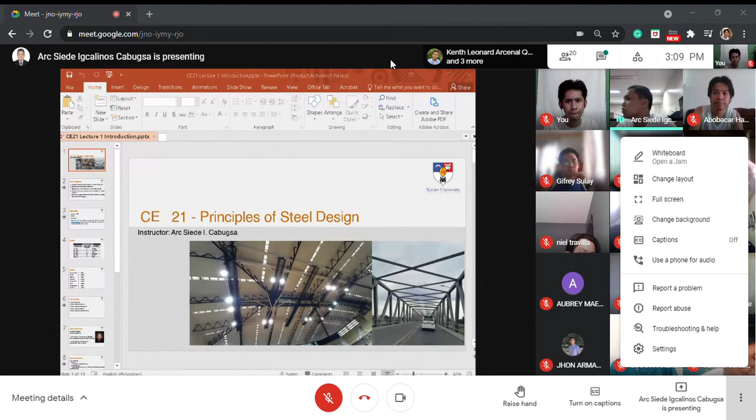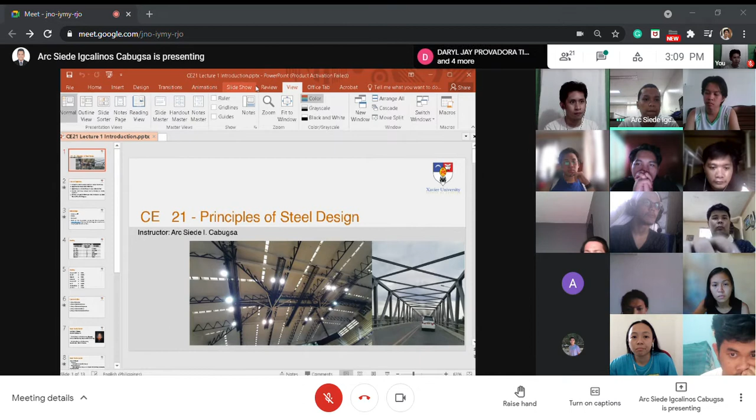Okay. So this is steel design, CE21. It used to be CE51 man siguro to sa una. Dili ko kabaloon sa ilahang basis for the class code nga ilahang gibago. Alright. Sige. So kani.

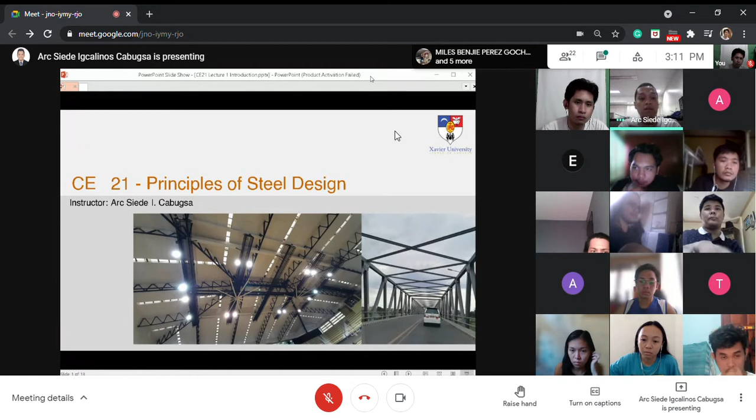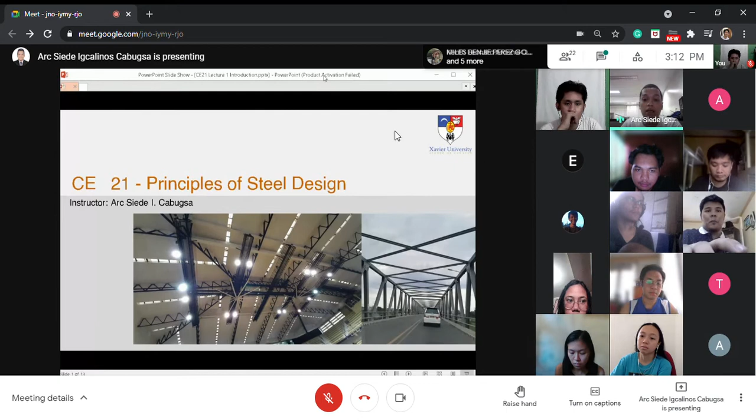Okay, so these are the things na in the future kaya nato i-design pag mahuman nato ang course nato, ang steel design. So that's the simple course description for steel design. You know, knowing the basic principles of steel design, and of course knowing how to design the basic needs of the community nga naghihimo na ug mga steel structure. Okay?

First, we identify the constituent materials of steel. You also need to understand their behavior. Pero I believe na nahuman naman nato ni sa strength of materials, katong elastic region, inelastic region, plastic region, then katong rupture. So same gihapon diri sa steel design. Pero we are still going to review on that concept, then atong gamiton ang mga steel, right?

We'll also apply the fundamental principle of steel design. So katong picture ganina, we'll try to design that one at the end sa course. We'll apply techniques in structural design and analysis. Although basin medyo limited lang, mag-focus ta sa design of each element lang. So we have the tension members, the compression members, and the flexural members. Limit lang ta ani to keep this subject simplified. Dili lang ta mag-add sa medyo complicated. Pero my hope is pag mag-practice na mo, kaya ninyo i-learn on your own. Okay?

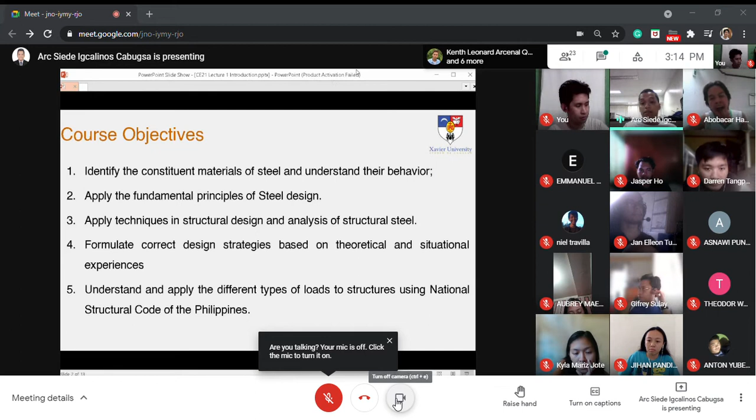Methodology, very important. We'll have very limited lectures via PowerPoint presentation. Wala pa ko nag-schedule og synchronous meeting. But we will focus on modules. Naa koy modules nga kinahanglan ninyo i-comply. These modules gibuhat na nako katong 2019, ako mismo, then karon i-share lang sa inyo. Mura lang kog mag-direct sa inyo asa mga direction padulong.

Okay? Then we'll have assessment for each module. Each module will be like for 4 hours. Each module is to be completed in weeks.

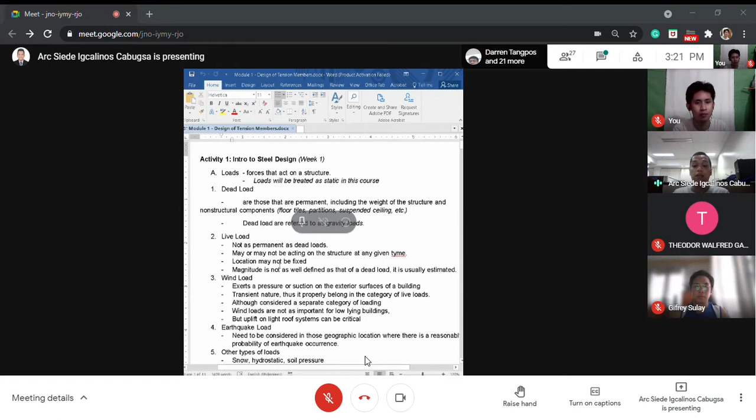So, we have live load. These loads are not permanent as dead loads. They may not be acting on a structure at a given time. Their location may not be fixed. And the magnitude as well is not as well defined as the dead load. So kinahanglan nato i-estimate ang live load usually. Pero naa'y mga references nga mag-guide in what values of live loads to be used.

Okay? So, a type of live load, I want to make this clear. A type of live load is your wind load. This exerts a pressure or suction. Pressure meaning, kung i-touch nimo imong wrist, maka-feel ka og pressure at that point. Alright?

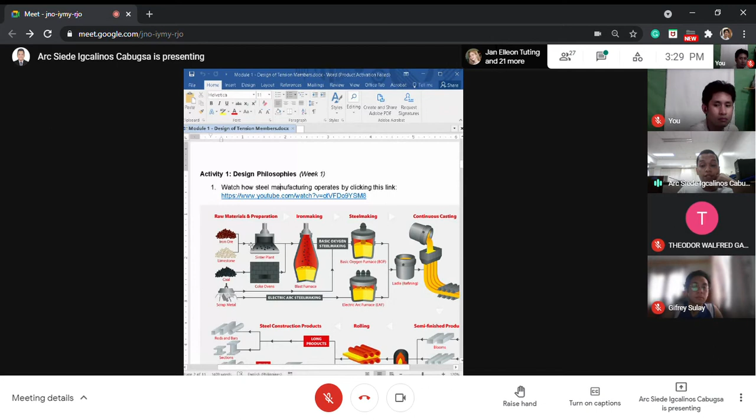Then, okay. So structural steel. It is an alloy primarily made of iron and carbon. Sa inyong activity on your own, you're going to watch how steel manufacturing operates. Okay. Chief component is iron. Earliest use was for small tools produced by heating ore in charcoal fire. Then generally steel is ductile because of its ability to undergo large deformations before fracturing. All right.

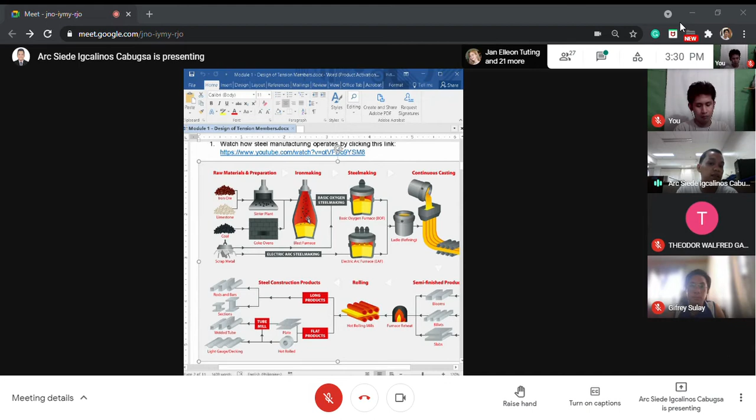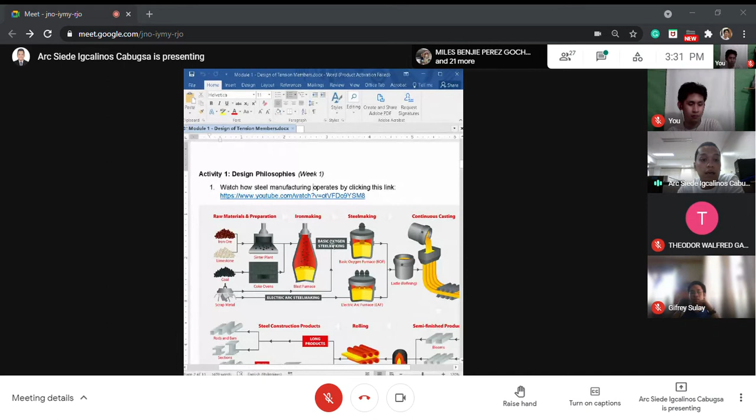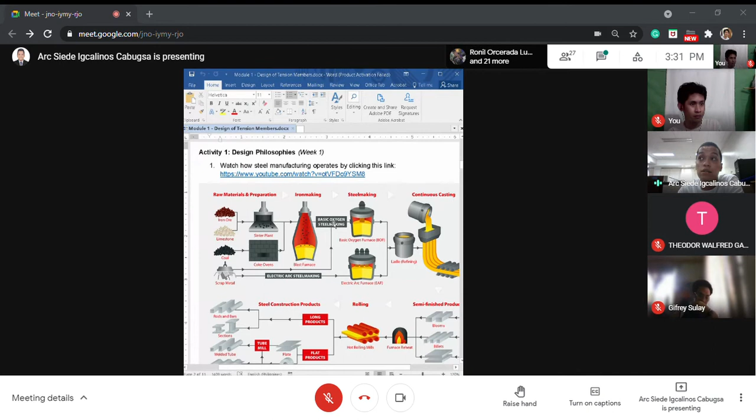All right. Anyway, may YouTube video dito that I'm going to ask kinahanglan niyo tan-awon because after this activity sa inyong week 1, no? So next week mo lang na inyong buhaton. Now we will not be meeting next week. First is you watch how steel manufacturing operates. Okay, this is a 15-minute video. I believe it's very interesting. So next Saturday, I'm going to post a quiz, multiple choice, no? Kung unsay sulod atong YouTube video. Okay? I hope that's clear.

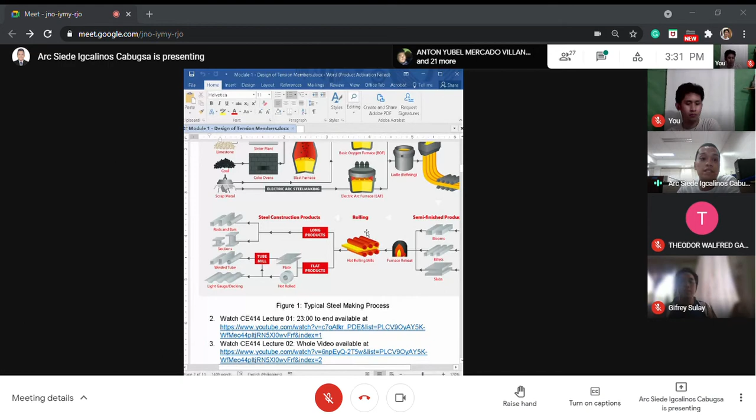So I have a friend abroad, no? He's also a steel instructor, steel design instructor. So yung gibuhat is gina-record ang iyang tanan nga mga lectures, updated year per semester, no? Gina-upload tanan. So dito pod ko ga refer kung gusto ko magtuon balik og steel design. So I want you to just watch this faithfully, no, tanan.

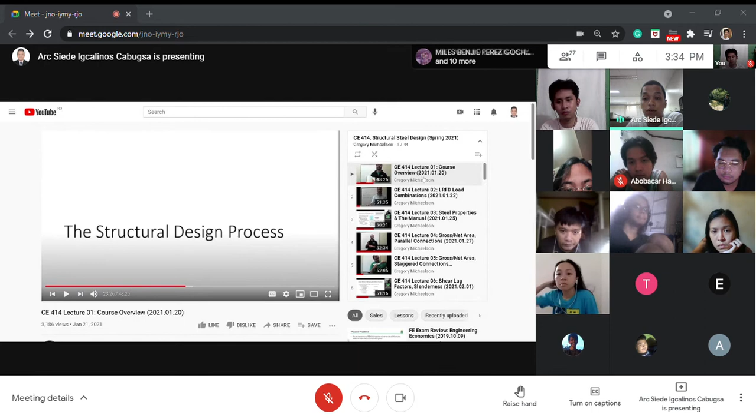Alright. Okay. So first would be the course overview. Discuss dari what is structural engineering, then unsa mga prerequisites. Okay? So next Saturday magkuha gyapon ko og some items sa iyahang class discussion. Okay. So definition. But essentially it's the science and art of designing.

So for next week, your assignment is to watch the lecture 1 and lecture 2 of his lectures. This is from Gregory Michaelson, and after that one, mag-leave ko sa inyo og isa ka classwork. Sorry, up to lecture 3 ang tan-awon. Up to lecture 3. So that's around 2 hours and a half.

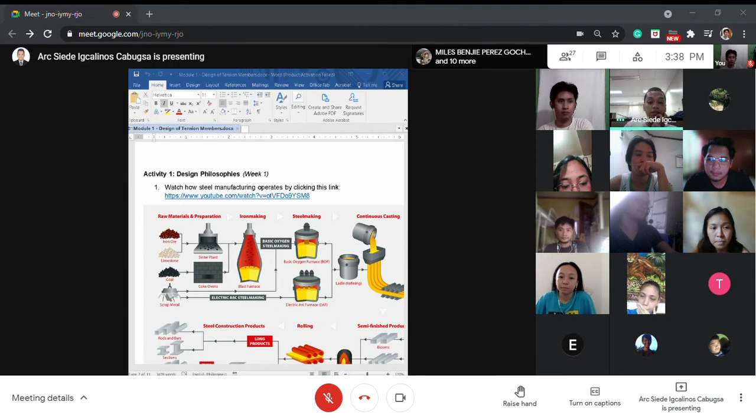Okay. Then next is you're going to watch CE lecture 1 and 2. No, introduction ni siya to steel design. Introduction to steel design and mga load combinations sa iyang istorya. Load combinations. Then you're going to have your first class assignment, which is this one, no? A structural element is subjected to the following bending moments. Pero although murag review ra pagyapon ni sa inyong theory of structures, no? Compute the maximum factored moment using the load combinations below, LRFD, NSCP, no? So mag-use ta sa to ang NSCP, no?

Kung naamoy gusto pangitaon no na mag-upload. Pag-upload ko og PDF copies sa to ang NSCP 2015, then naka-note na dire 203.3.1, so makita ninyo tanan nga formulas dito, no? D is for dead load, L is for live load, LR is for roof live load, W is for wind load, E is for earthquake load. Pero tanan niya designation na dito sa itong NSCP. So I'm going to upload niya on that one.